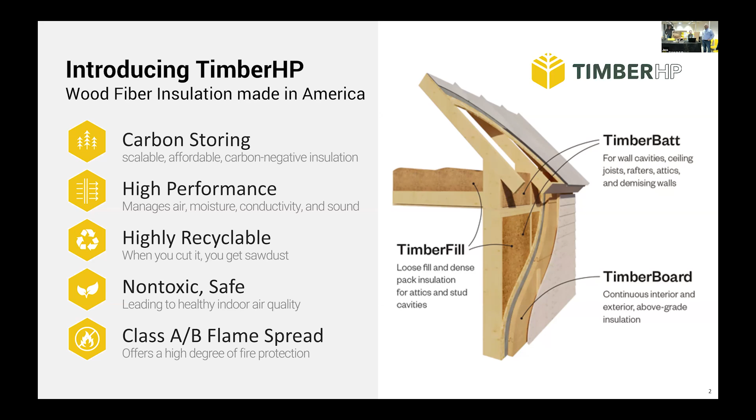A wood chip is a fascinating thing. And when I think about what the University of Maine has done with some of their biofuels efforts, and now the turning a wood chip into insulation, what is the next innovation that is going to lead to?

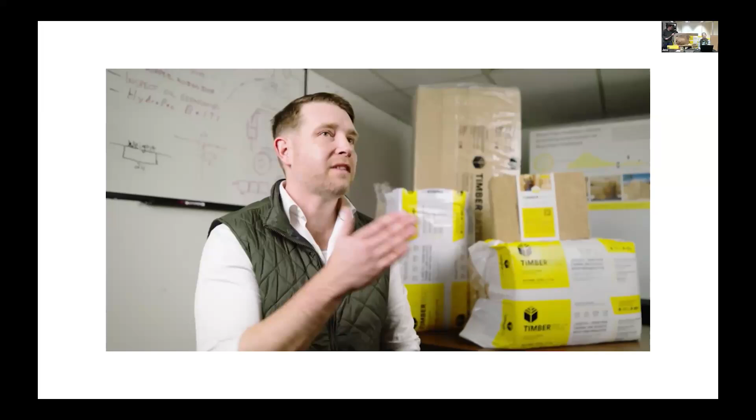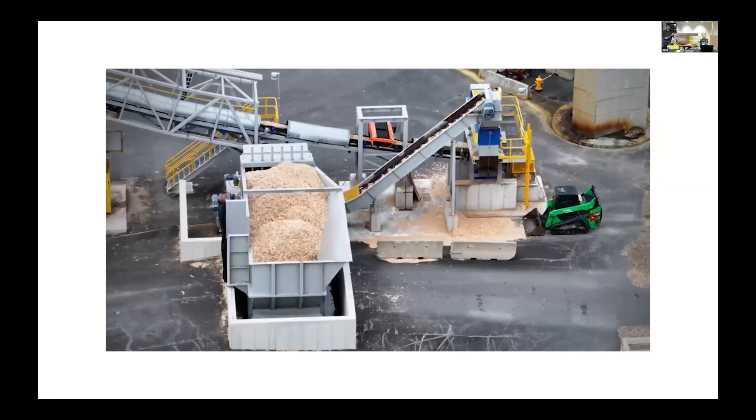We have this future that we envision, not just in Maine, but everywhere, of sustainable products in every sector of the economy. When we started this company, we were focused on creating the next generation of sustainable building products that utilizes our natural resources, and in these communities where we've traditionally manufactured, in this case, paper, but now wood fiber insulation.

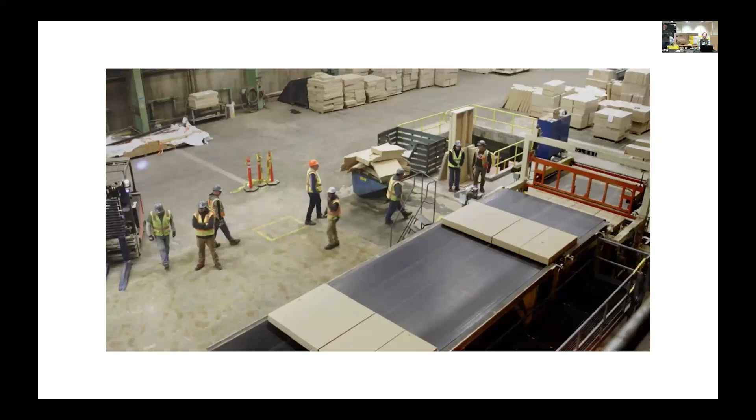When we found this mill, it was about the people who had worked here before and what their knowledge of not just this building, but 24/7 wood products manufacturing and all of the value that they brought.

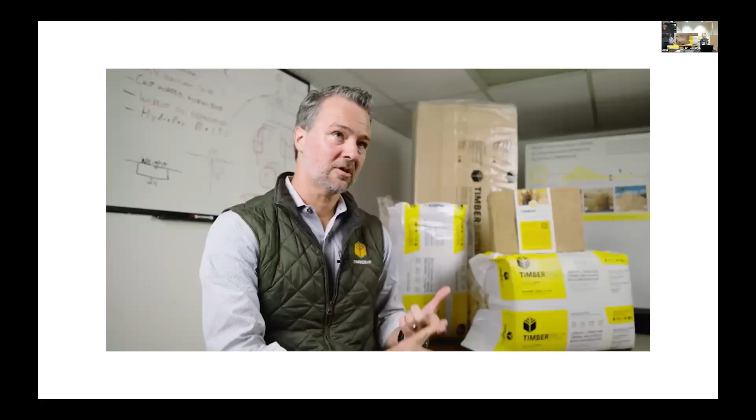It's really about finding the partnership, and UMaine Advanced Structures and Composites are the partner for us to be able to take what we can do well, which is the manufacture, and to bring in what they do so well, which is the building science and the science behind wood, and really work together to ensure that we have a robust opportunity with these products that are durable and are going to perform well, and quite honestly, are going to result in the next generation of building systems.

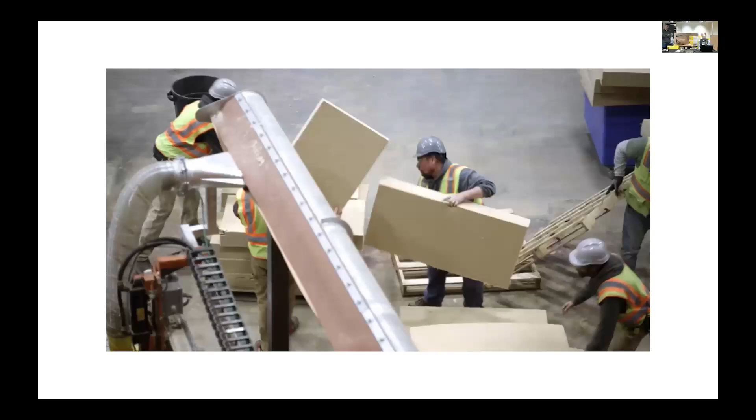To be part of the team that brings a manufacturing site back to life, it means a lot. All of these are Maine folks who want to see some growth opportunity, that change. And it's really about all these diverse people coming together.

With research and development, it's a lot of crazy ideas, and that results in a lot of crazy problem solving to things you haven't seen before.

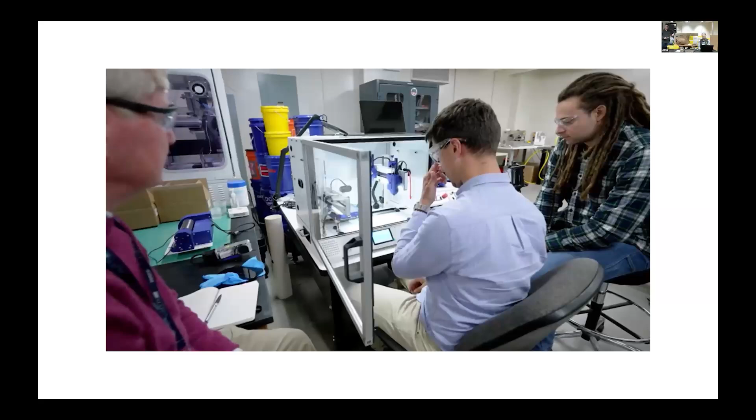What the engineering, technology, and UMaine programs do really well is expose you to as many things as possible. That way, when you get into the industry, I know where to find the answer, and I know what questions to ask that will help me arrive at a solution.

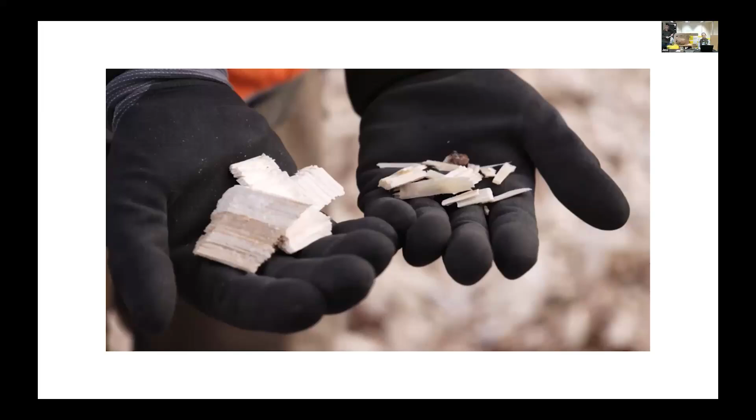For me, it's not about what any one of us has done, but it's what we've done together. It's about the Maine people doing something that is actually galvanizing and results in positive change.

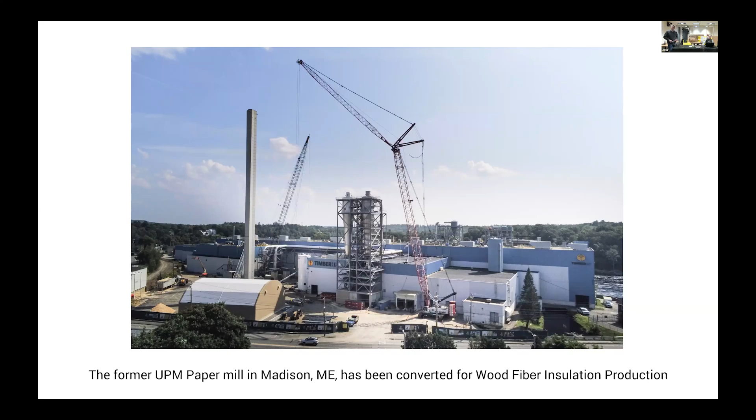So this next slide really talks about what's happened with the timber industry, the forest industry in Maine. I mentioned that I graduated from the University of Maine a long time ago. Well, in 1990, when I got out of school from studying pulp and paper, there were, I believe, 19 mills in the state that were working with the forestry industry to harvest these forests and working with the sawmills to take their residuals and process those chips. There are 4 mills left running in the state right now.

And this mill here was an important part of my life, but there wasn't a room for the product anymore. This is really the only mill in the state that has been brought back to life, and we're doing it making a forestry product. And the main raw material is chips. We're able to take those residuals from the sawmills and make them into a very much a value-added product. And Jess is going to talk about what we do with those chips.

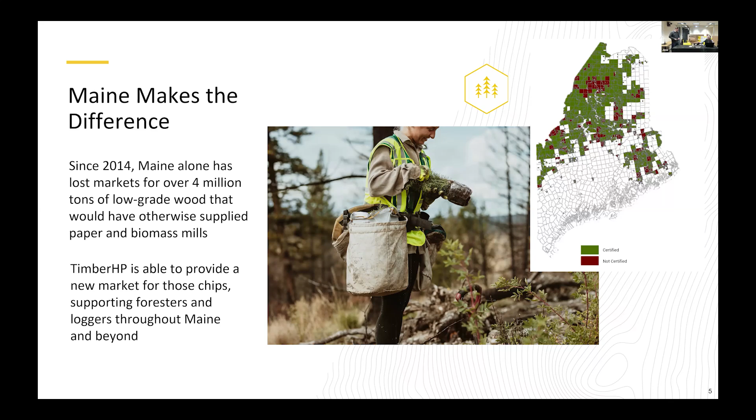Hey everybody, I'm Jessica Vino. I'm the operations manager here at TimberHP, and like Steve, I was lucky to work at 3 other mills in Maine, paper mills on 3 different rivers in Maine. I started on the Penobscot working for Georgia Pacific, headed out west to the Androscoggin, working at the Rumford Mill, and now landed here on the Kennebec at the Madison Mill with TimberHP.

So what I think is really amazing, and you heard me talk about it in the UMaine video, is Maine has a history of manufacturing for hundreds of years, and we've used our natural resources for a long time. Through many small towns in Maine, along rivers in Maine, you'll hear that was the old dowel mill, or that was the old stick mill, that was the old paper mill. We have a heritage here in this state of using our raw material and turning it into something value added.

Steve mentioned, I think, the residual chips. That's a byproduct from the lumber industry. So we're actually taking a waste stream from another manufacturing process and using that to make our final product. People have asked me a lot, well, what species do you use and why? First of all, we use softwood chips instead of hardwood, just from their base components.

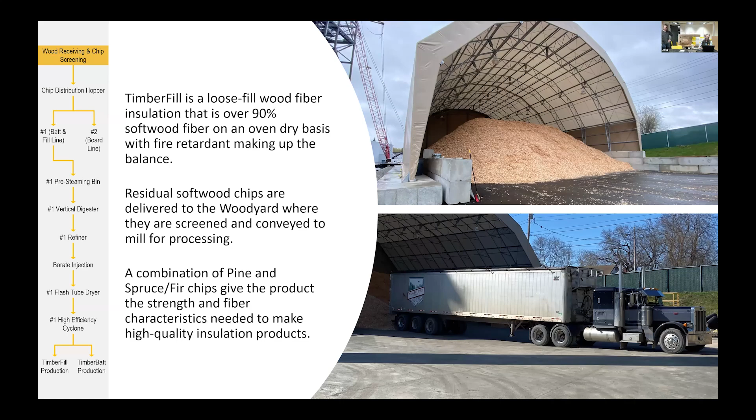This fiber line is going to supply wood for all three of our products, so the wood yard is common to all three products. It's once we get inside that we have a choice if we want to send them to fiber line number 1 or fiber line number 2. We'll show you that coming up.

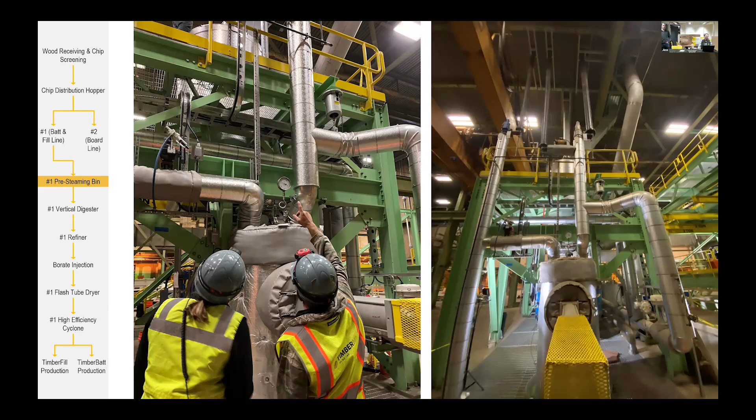So now we're inside the mill and we're going to start to process these chips that we've blended and screened, and now they've entered the building. In the left shot, you can see we're pointing up at this vessel called a pre-steaming bin. Before we refine our chips, we've got to soften them up, and we do that with some steam. That pre-steaming bin is just taking steam at atmospheric pressure and pumping it into that vat to start to get those chips warmed up and softened up.

And then we're going to take them to the screen on the right. You're looking at a digester, and this is the top of the digester. For any of you familiar with the paper industry, when you hear digester you're thinking they add a bunch of chemicals to dissolve the chips. That is not what we're doing here. This digester is simply a pressure vessel where we use about 100 PSI steam to help soften those chips further before we refine them. The reason we need to soften them is that helps the refiner liberate the fibers wholly instead of breaking them into really, really fine dust.

One of the key elements of this process is to be able to do that on a continuous basis. So as you can imagine, you've got pressure in this tank, the pre-steaming bin, and we've got to get it into this digester at 100 PSI. To do that continuously, these chips come in and go through what's called a plug screw feeder. This screw compresses the chips like a cone and forces them to make a plug, which separates the high pressure side from the low pressure side. That screw runs continuously, and this plug keeps the pressure different, allowing us to feed these chips into the digester on a continuous basis.

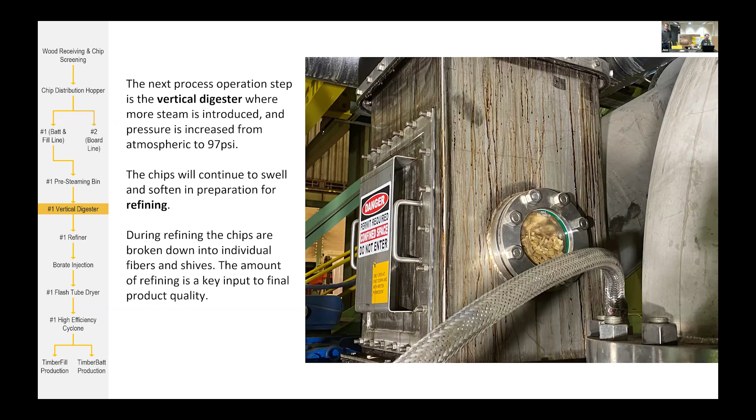Do you want to talk about the... Yeah, sorry, the plug screw feeder's fine. It's so exciting. I didn't know if there'd be any questions on that, Alex, but we'll move on.

We do have one question in the chat. Okay, not about the plug screw. Oh, sorry. The actual question is, do you burn chips as fuel in your boiler system as well, or do you use bunker C or some other fuel source?

Our fuel source is natural gas. One of the beauties of this site is several years before the paper mill shut down, we benefited from a natural gas pipeline coming into the area. So we use natural gas for our boiler to generate steam, for our dryer, for our oven on the batt line, basically for all of our heating sources. Great question, though.

So if you can picture, we had just looked at the top of the digester. Now we've moved one level down in the mill. We're actually looking at the bottom of the digester. At this point in the process, the chips have sat at about 100 PSI, approximately 330 degrees Fahrenheit, for 5 minutes, maybe a little longer. So now they're really soft and ready to go into the refiner.

When I give tours here, we kind of joke that the refiner does not look like much from the outside, but it's really the whole heart of the mill and what we're doing. So I brought for you this very heavy plate. What I'm showing you is one segment out of 12. There would be 12 of these segments to form a complete circle, and then there would be a duplicate set of 12.

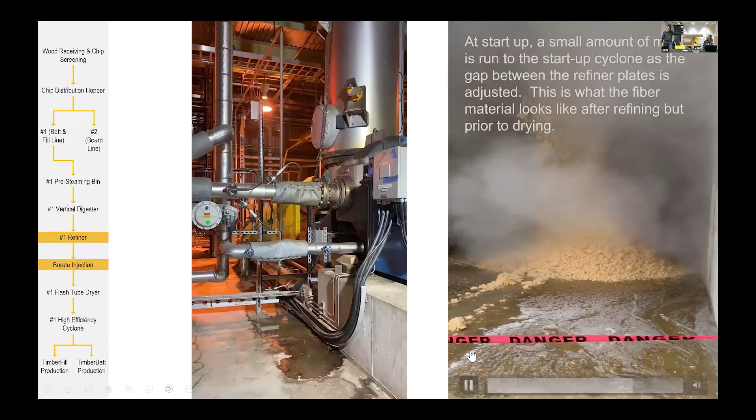I think this one was me too. So if you can picture in your mind that fiber you just saw blowing out of the startup cyclone, we have a diverter valve. As soon as we're ready and the fiber looks good, we switch this valve over to our flash tube dryer. And what is a flash tube dryer?

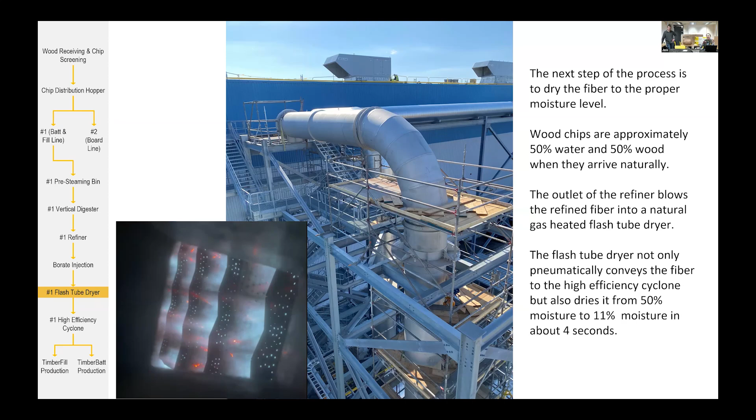I think I've got a video here, but the job of the cyclone is really just a separation device. You're going to see the warm, moist air, leaving all of that moisture you've driven off from the fiber, exiting the cyclone out the stack on the top. And then your dry fiber is going to swirl around and separate out of the cyclone and will be ready for processing.

I think commonly Steve and I were talking while we were looking at this - people in the community might call this your smokestack. It's not smoke. You're seeing the moisture and vapor, the water that's being driven off of the raw material as it dries.

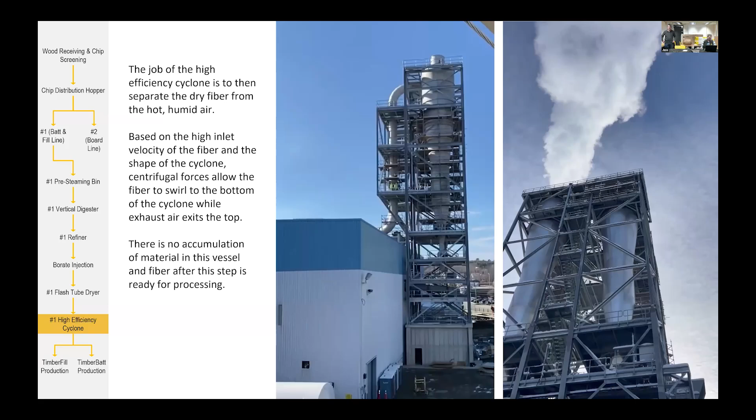So now we've made our fiber, we've processed our chips, we've made our fiber, we've added our borate, we've dried it in the flash tube dryer, and now it's time to take that fiber and run it through our two production lines. The first of which is our loose fill line.

It was the first to start up. This little video shows the processing of this, but what we're basically doing is compressing and packaging that raw fiber that we just made so that it can then be sent to our customers and blown into attics and wall cavities.

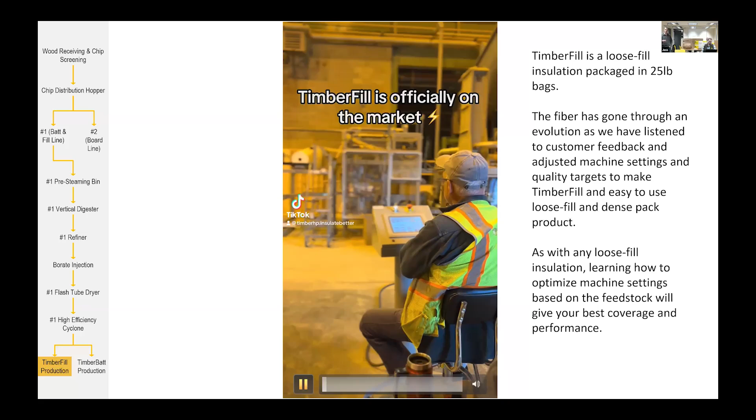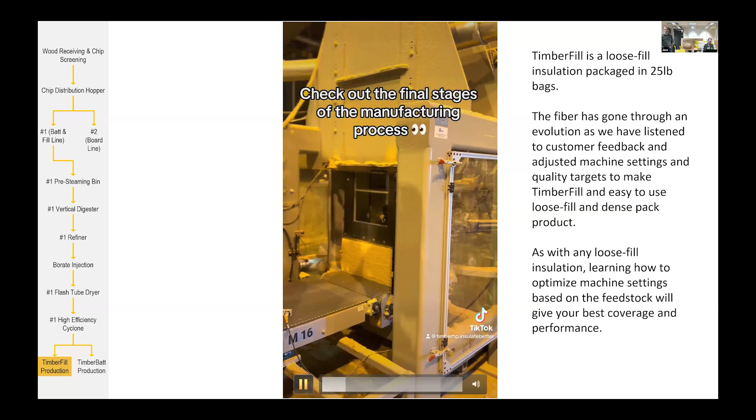So this first part of the process is just a compression chamber. We feed the fiber into this chamber using an auger, and there's a ram that comes down, that black device in the middle, compresses that fiber, and then it's gonna leave there and go across the scale where it says M16.

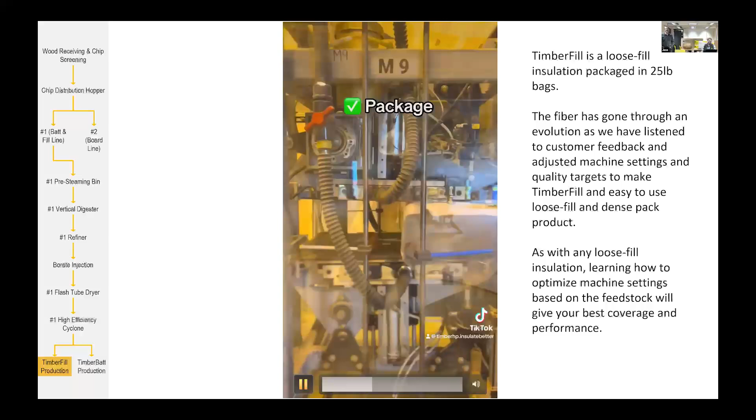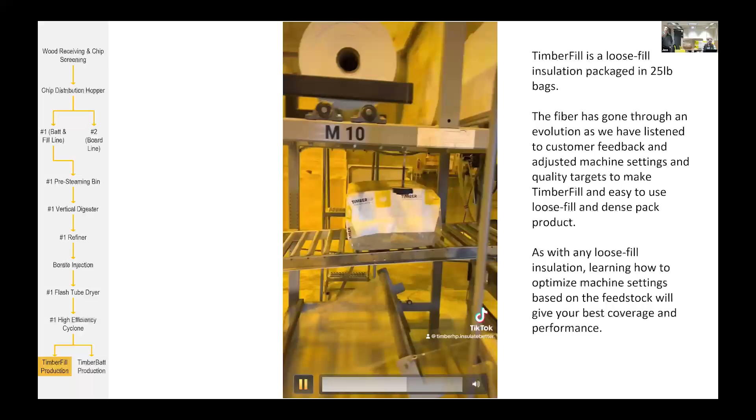So we weigh each bundle and then we recompress it and send it. We got the little squish there. We recompress it and finish our packaging part of the process. After this, we check the bundle for size. We can't have bundles that are too tall or it messes up our palletizing.

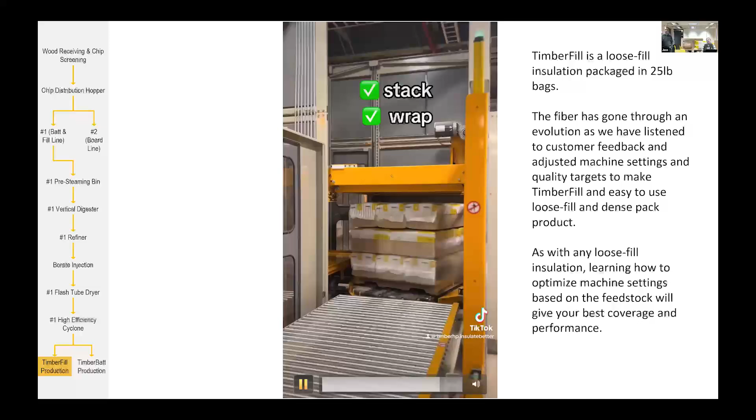And also, since this video was taken, we have an inline moisture meter and we check the moisture on each bundle and have specs set up so that we can kick bundles off the line if they aren't the right moisture content. So that's really the basics of loose fill.

It sounds very basic, but that's been a very tricky line for us to work with and get the product right. There's been a lot of iterative process feedback through our sales team from our customers. It's taken a lot of work to get things right with the loose fill process.

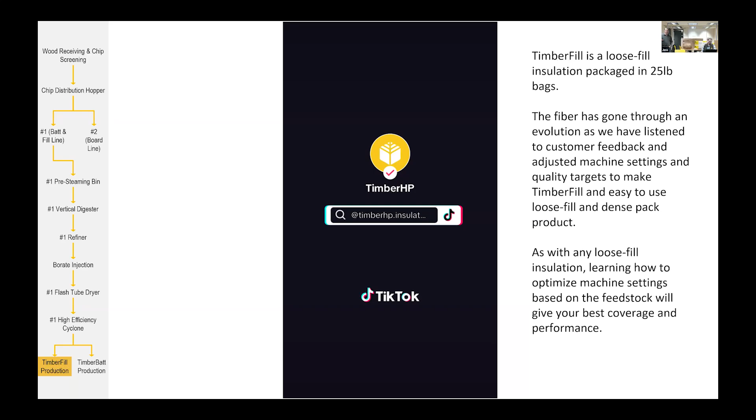So we're going to move over to the batt line process. There's Scott. Takes two clicks to move over to the batt line.

So now with the batt line, it's a more complicated process, and it starts with an additional additive. I'm sure you've handled batt insulation. It's like a loose matrix, but there's some strength to it. You can sort of peel it apart. Well, you need to bond those wood fibers together in that matrix.

And to do that, we use a material called bicomponent fiber. And I've got it here. It looks like cotton. I think Jess is going to lay that right there. This bicomponent fiber gets mixed with the same wood fiber that we would use for loose fill, comes over to the batt line.

We mix it with this bicomponent fiber. And these fibers are very, very fine. It looks like cotton. It's probably hard to tell on the screen, but it's very, very fine, very, very soft. These are 6 millimeters long.

So you're only talking a quarter of an inch long, and they're very, very fine, but they're actually made of two components, thus the name bicomponent fiber. The two components are a core and a sheath. And the core has a higher melting point than the sheath. This is really what's key to this whole batt process.

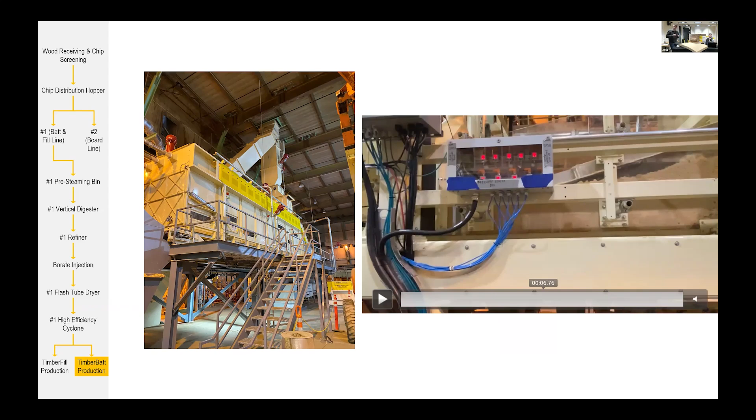We're gonna mix the bicomponent fiber with the wood fiber. The video on the right is showing mixing those together. We're gonna now form this into a mat of fibers that is 8 feet wide in our forming section of the line. That sets us up to head into our oven. So you can see, there's the fibers filing into the former, getting a little pre-compression.

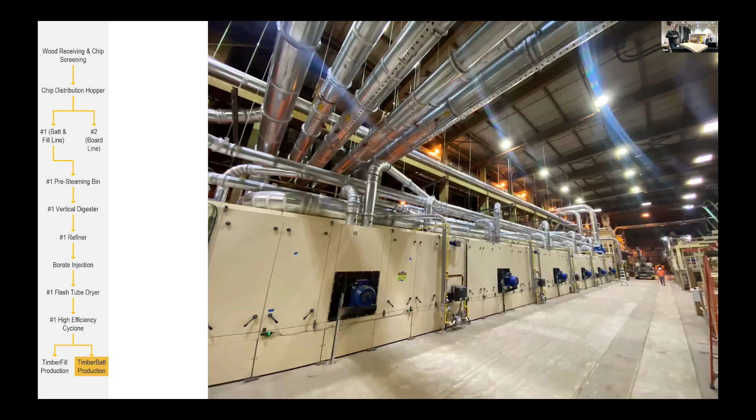So now here on the right is the oven. And the purpose of the oven is twofold. There's a top belt that can move, and that sets the thickness of our material.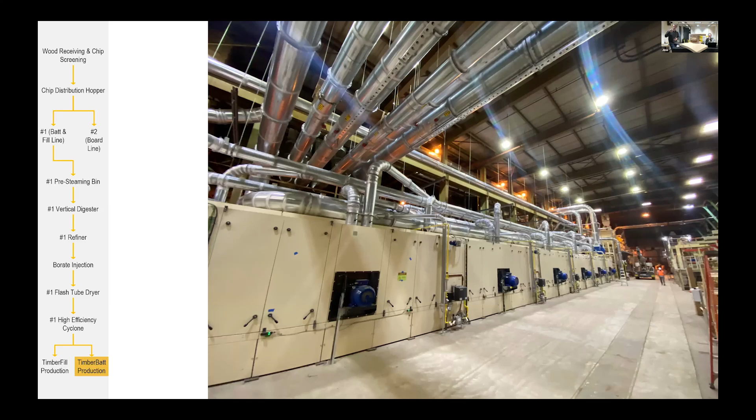So like what we were producing today, like what's here on the table, we're producing for 2x4 wall cavities. We've got a 3.5 inch batt that we're manufacturing, and those belts will come together and take that mat off the former and come down to 3.5 inches to set that thickness. That's one of the key functions of the oven.

But the other key function of the oven is to get the temperature up inside so that we melt the sheath of the bicomponent fiber, but not the core. The sheath is made of polyethylene, and as you can imagine, once you heat that polyethylene up, it gets tacky, it gets soft, it bonds these wood fibers together in this matrix. By not melting the core, it still maintains its integrity, so that core helps with the strength of holding the individual fibers together inside this batt structure.

We're gonna find our mouse here. There we go. All right.

So the process steps, Steve just talked about the oven. When the batt comes out of the oven, it's very warm, very, very soft. So it needs to go through essentially a curing step where it cools down, and that polyester core can cool and set and be ready for further processing.

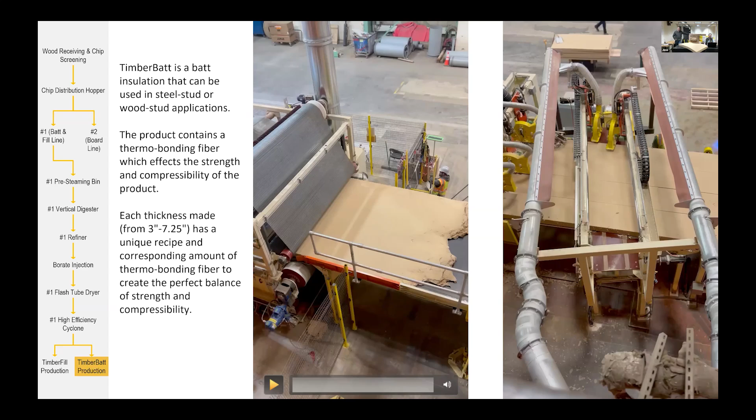Let's see if I can pause this video right there.

So these ducts that you see, we have rip saws that cut the product to width. If you want wood stud spacing, you can order that. If you need steel stud spacing, we adjust the saws so you can order that. And these ducts pull all of the sawdust from cutting away.

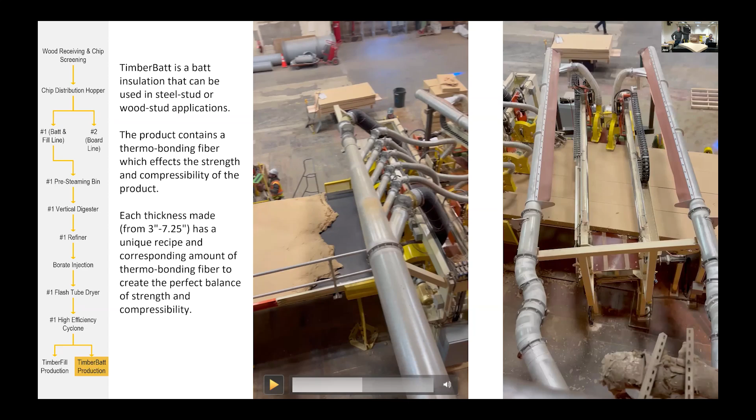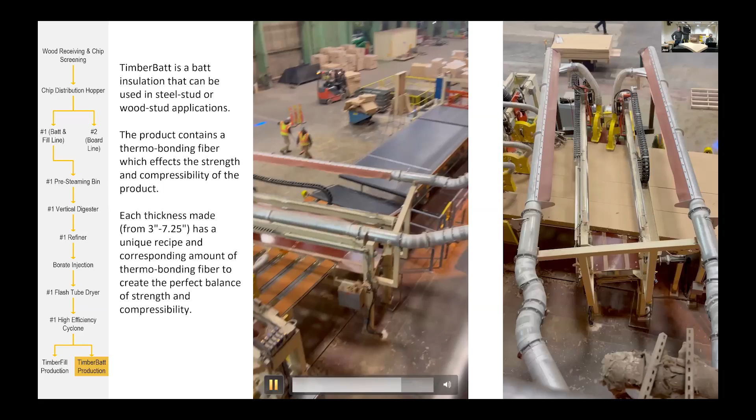Once the product is cut to width, we have 2 vector saws that are going to cut it to length, but I think I've got a better video of that. I'm going to pause here just to show you guys the expanse of our room.

Paper machines are very large and the operating floor is very long. One of the great things about this mill is it had plenty of space for all the equipment we were going to need. So the black conveyor belt you see is going to take those cut bats, which are cut to dimension, stack them up, and put them through our heat shrink wrap machine into a bundle. Those bundles are palletized and then hood wrapped and sent to our warehouse for storage.

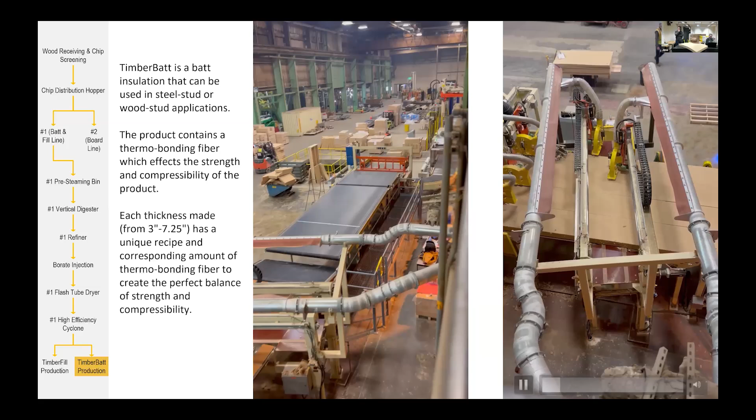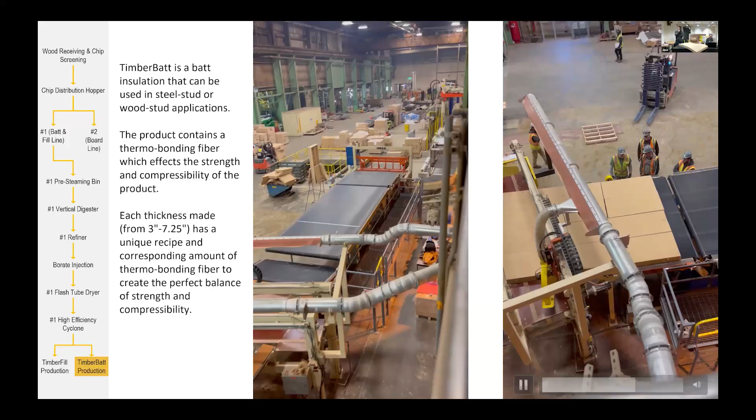This video I'm showing on the right is our vector saws. As the product is moving, the vector saws are pitched at an angle because they have to travel with the bat as it's coming down the line. As I said, we do both wood stud and steel stud dimensions, so 47 and 48 inches long.

The product thicknesses we make on this line currently range from 3 inches all the way up to 7 1/4. And like Steve was talking about with the thermo-bonding fiber, every single thickness we make has a unique recipe. So we try to strike the right balance between strength, flexibility, and compressibility depending on the thickness of the product.

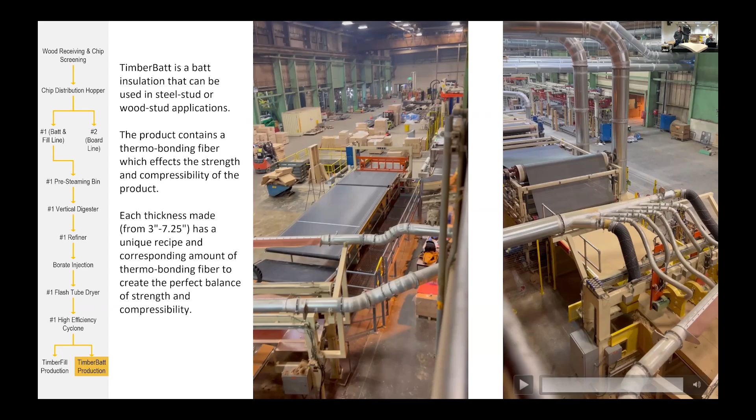So we've talked about our first 2 production lines, which are up and operating and providing a great product out into the market. The third one, as Scott mentioned, is our board line. This is a picture looking down the room at the board line, which has similar unit operations to the bat line, but it'll use a Gorilla Glue type adhesive to make a firm board versus the flexible bat.

This production line was in operation in Germany for approximately 8 years. Our co-founders bought this line before they even had a place to put it, so we're happy that they found the Madison mill and it's been a good place to put it. Over the last couple of years, we have completely reassembled the line with a lot of help and guidance from the original equipment manufacturer, a company called Dieffenbacher. They've been incredibly helpful and we've got it 95 to 98% complete.

We were well on our way, but had to put the brakes on this project in early 2024 for financial reasons. We're currently working on our Series B fundraise, and a key part of that fundraise is to complete the construction and conduct the commissioning to get this line started up. We're very close to having that fundraising done, which should put us on track to do our commissioning process through the summer, with the target of having a board product in the fall.

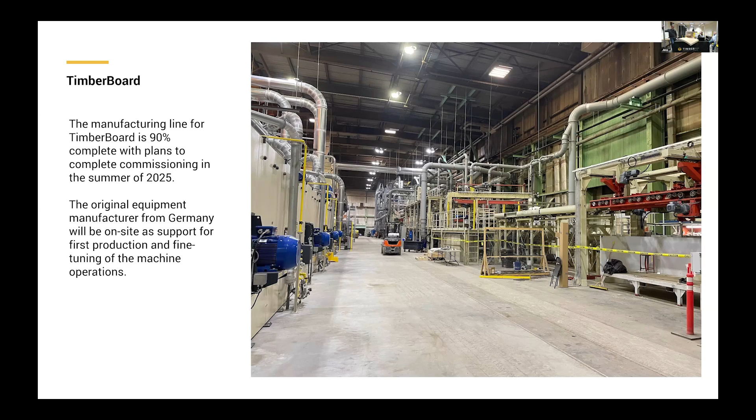So with that, I think we're going to hand it back over to Scott and his team.

Sure, thank you, Steve and Chess. That's outstanding. I hope those of you that may have attended these calls in the past, I can't see how you wouldn't have gleaned something new. That level of deep dive into the production is fantastic.

So what I want to do is just remind folks of the 2 products that we're on market with. And then what we'll do is shift into where to procure the material. And I know there's people from all over the place.

Primarily right now, today, our target market, because we're located in Madison, Maine, so we have to think about transportation. But what we would call our ideal market would be all of New England, New York, Mid-Atlantic. We are also out into Ohio and Indiana, which takes you a little bit beyond the 500-mile radius. We are partnered with Cameron Ashley Building Products, who have 60 locations across the United States. So for those of you away from the geography that I mentioned, there is a pathway for us to get you product.

It's a bit more expensive because of the transportation. Alex Donnelly, who's been feverishly responding to your various questions, is here in the room today, and he works magic for those situations. But what's critical is as we come out into the market, we ideally want to work in our backyard, working with architects, designers, developers, builders, remodelers, our channel, so that we can go out and do the due diligence in the field, creating the education and creating the interest. And we'll continue to expand beyond that. The two products we are on market with are TimberFill.

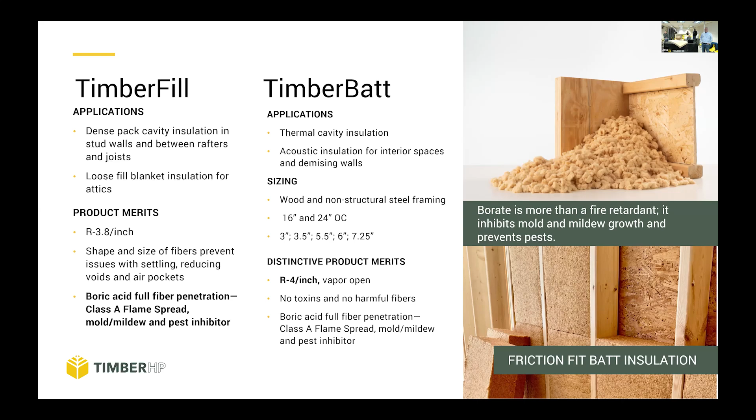So for those folks here in New England and New York, like I said at the beginning of the presentation, we happen to be doing our sales and marketing meeting here at the mill, and we're not up here that often. I wanted to have a chance for Bill and Addie and Paige to introduce themselves, give a little bit of their background before they came to work here at TimberHP, and then reiterate the markets they serve. So, Bill, you're the local boy.

I'm Bill Ryan, Timber Territory Sales Manager here for Maine and New Hampshire. I've been in the building materials industry for over a decade, previously with Andersen Windows. I find myself all across Maine and New Hampshire, a little bit on the edge of Vermont, depending on where the project leads us, but happy to support installs, specification inquiries, really kind of anything from the start through to procurement and install. Please don't hesitate to shoot me an email or ask any questions. I know my phone number is on the website as well. So fire away.

Hi, I'm Addie Atkins. I cover Massachusetts and Vermont for the company. I've been in the building materials world for a while now, first time into insulation, but I've been on the decking, the siding, trim side of things. So feel free to reach out if we can help with anything, whether it's getting a job priced out, connecting with installers in your market, or where to buy.